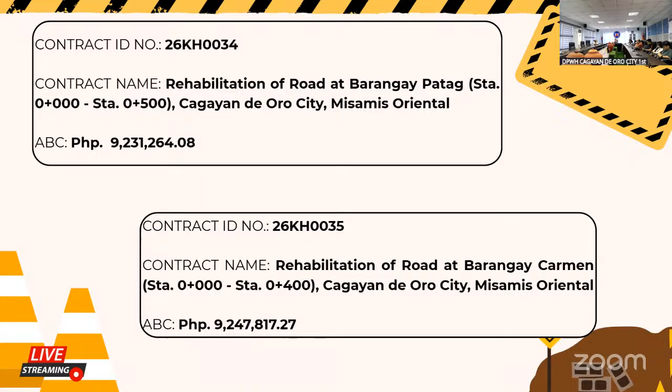So now we will start with the first project, 26KH0032, rehabilitation of road at Barangay Bayanga, Cagayan de Oro City, Misamis Oriental. This will be discussed by Engineer Aris Arizo.

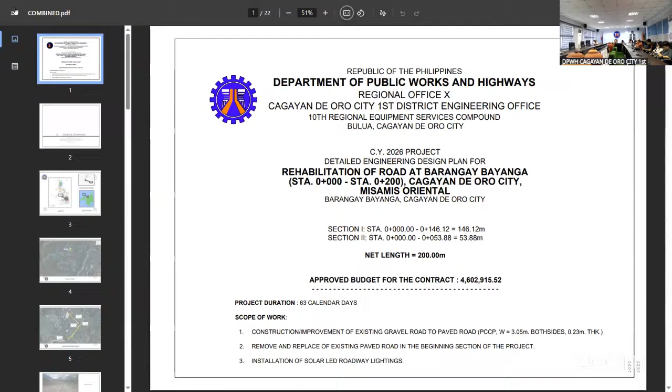Good afternoon, everyone. Rehabilitation of road at Barangay Bayanga, Station 0 to Station 200. This project is composed of two sections: Section 1, 146.12 meters, and Section 2, 53.88 meters, a net length of 200 meters. The approved budget for the contract is 4,602,915.52, and project duration is 63 calendar days.

The scope of work is improvement of existing gravel road to paved road, PCCP width of 3.05 meters both sides and 0.23 meters thick PCCP. There's also a section of remove and replace of existing paved road in the beginning of the project, and installation of solar LED roadway lightings.

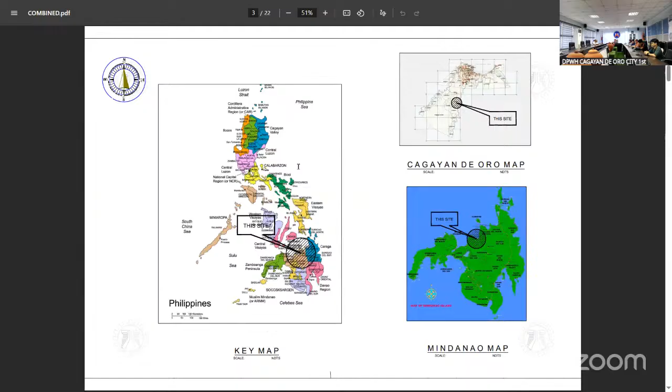General drawings: it is located in Barangay Bayanga. This is the vicinity map, and this is the site development plan wherein we can see section 1 and section 2. In the beginning of section 1, there is a section of remove and replace of existing PCCP.

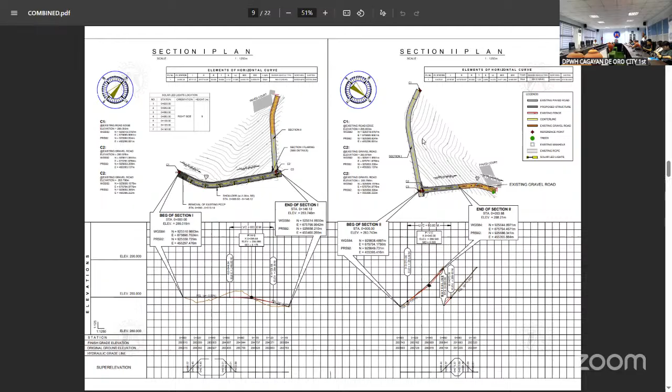So in continuation, sorry for the technical difficulties. You can see the plan and profile, section 1 and section 2. There's a portion in section 2 wherein the PCCP only caters 53.88 to get the 200 meters length. There's also the stationing of the solar LED roadway lighting. This is the straight line diagram.

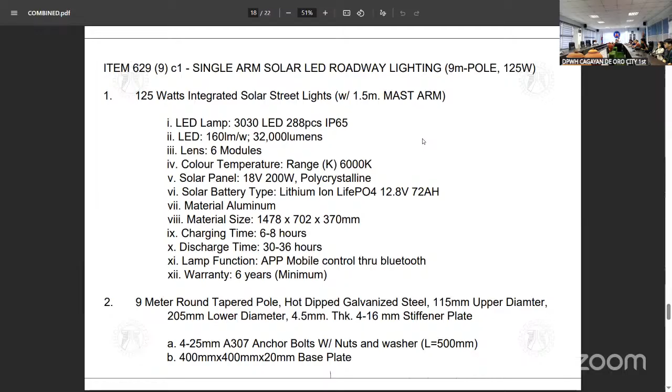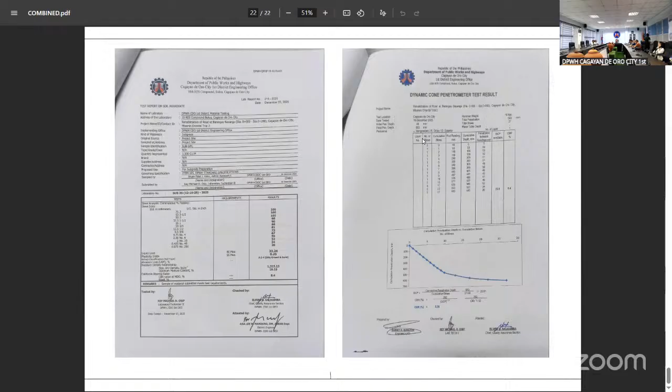So this is the specifications for the single arm solar LED roadway lighting. And we have here the attachments for our road right of way. We have here the permit to enter. And also in the attachment we have here our test reports for our soil investigation. So that's all for this project, sir.

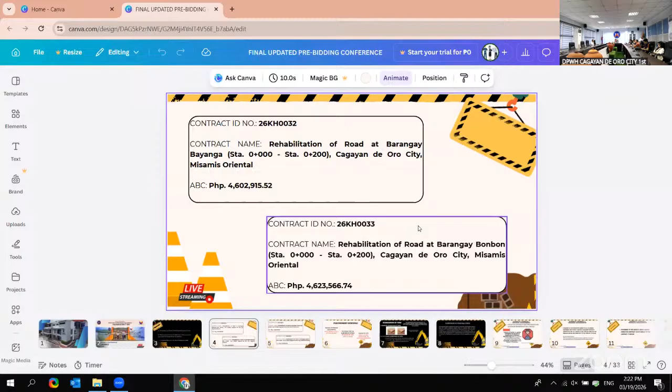Are there any questions from our prospective bidders? And from online viewers? So we proceed to the second project. Okay. So second project, 26KH0033, rehabilitation of road at Barangay Bonbon, Cagayan de Oro City, Misamis Oriental. This will be presented and discussed by Engineer Sheena Donatore.

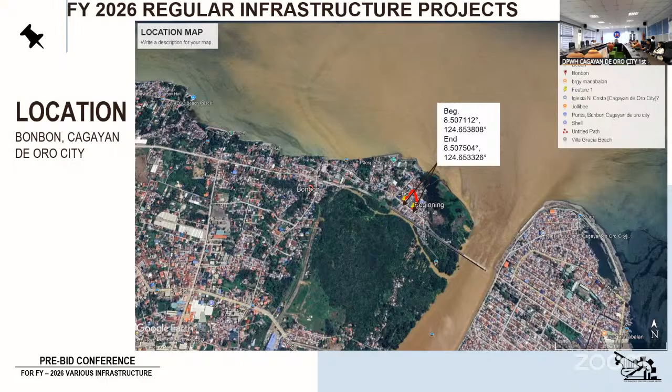Presenting to you 26KH0033 for rehabilitation of road at Barangay Bonbon, Station 0+000 to Station 0+200, Cagayan de Oro City, with 77 calendar days. Location Barangay Bonbon, with an approved budget for the contract of 4,623,566 pesos and 74 centavos. The scope of work: construction and improvement of gravel road to paved road and installation of solar street lights. This is the location for the project. Beginning station is near the Bonbon covered court.

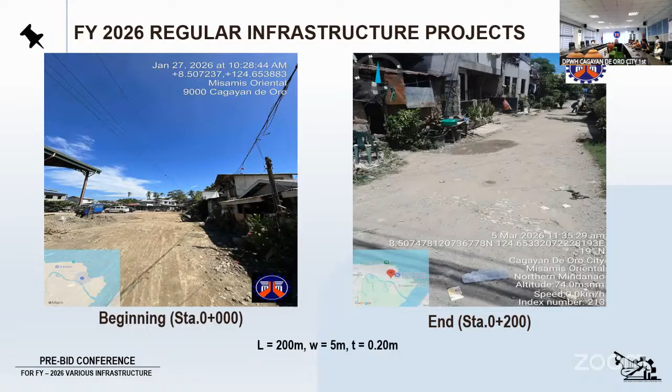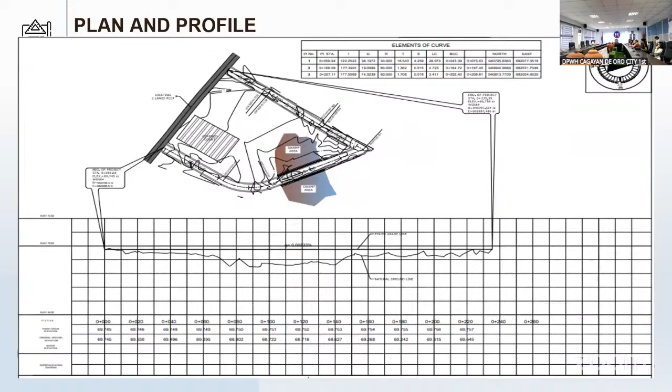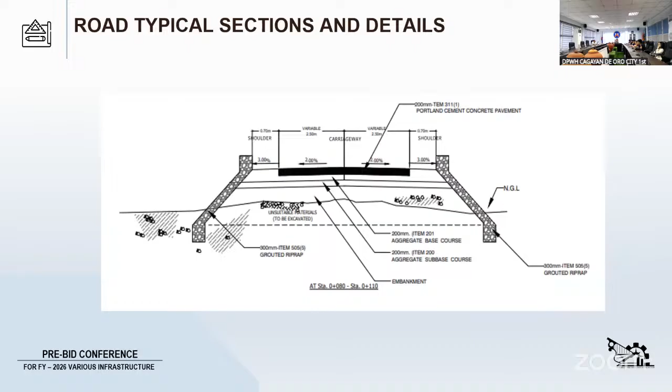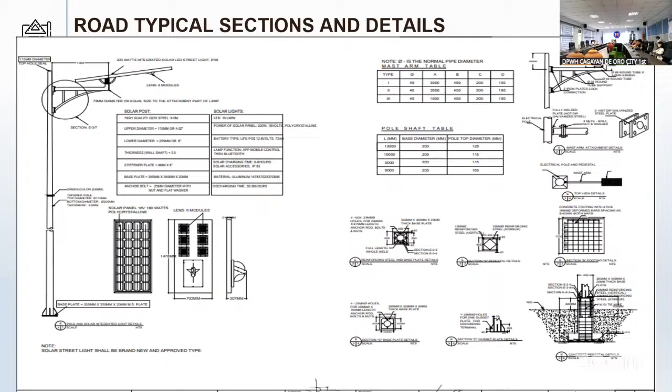This is the site location map, beginning and end station, with a length of 200 meters, width of 5 meters, and thickness of 0.20 meters. This is the plan and profile. The typical sections and details, including the slope protection detail. Closer look of the typical road section. And typical road lighting detail, pole light detail. Protections. Summary of quantities.

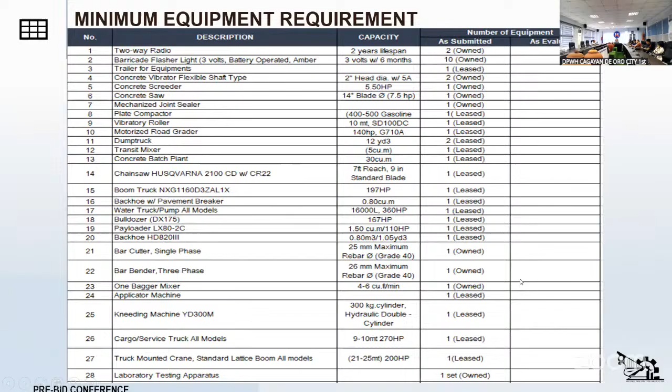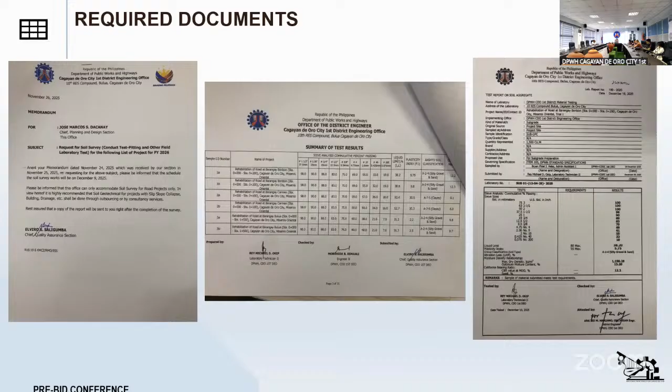These are the additional required documents for the road right of way. Certification of no objection from the barangay. The soil test results reports. And the straight line diagram. That's all, quantities are subject for bid bulletin, that's all for this project. Thank you.

Thank you, Mr. Sheena. Do you have any questions or clarifications from our speakers? Online viewers, if you have. There is none, sir. No question, so we proceed to the third project.

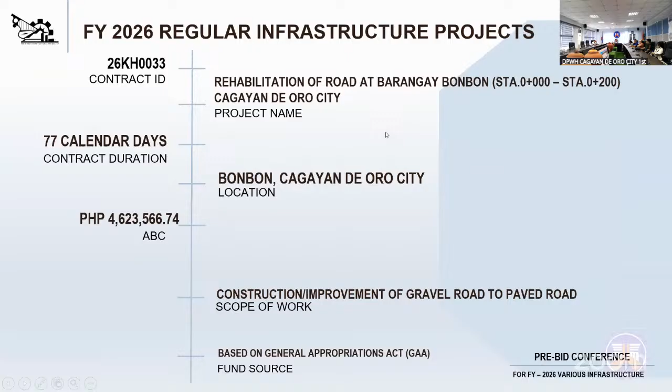Our third project is rehabilitation of Barangay Patag, Misamis, with contract ID number 034. Our presenter is Engineer Paris. So good afternoon again. So rehabilitation of road at Barangay Patag, Station 0 to Station 500, Cagayan de Oro City, Misamis Oriental, Barangay Patag.

So this project is composed of 4 sections. Section 1 has 82.02 meters. Section 2, 112.12 meters. Section 3, 237.23 meters. And section 4 has a gap in between, so 0 to 31.98, and 100 to 136.65 meters, 36.65 meters. So this project has a length of 500 meters.

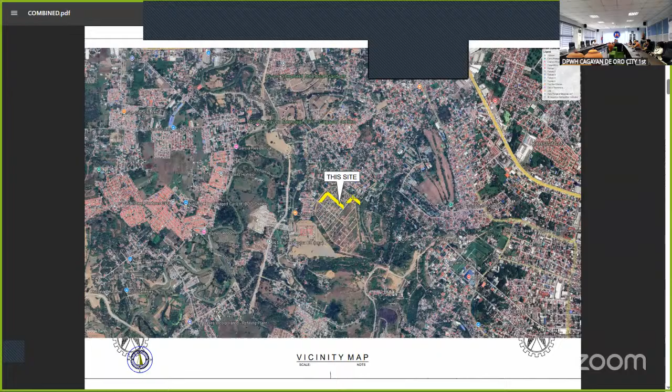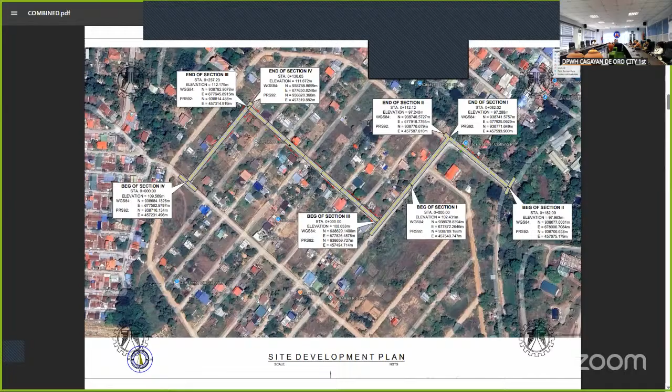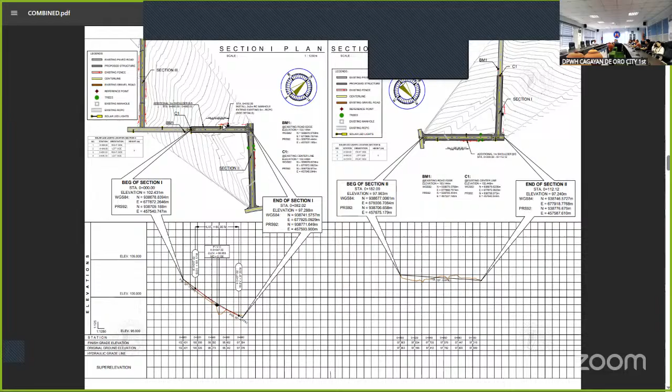And also we can see here the installation of 2 by 2 meters RC manhole, wherein we're going to repair a damaged RC pipe. We're going to install a 2 by 2 meter RC manhole. We can see the details. So these are section 3 and section 4. And in section 4, we can see the station gap between, and also the stationing of the solar lights.

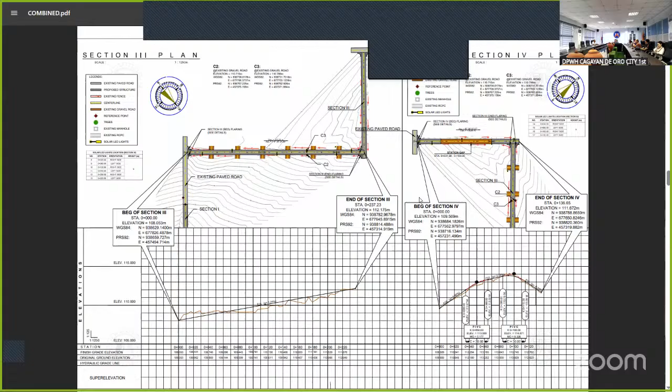This is the straight line diagram of every section. So for typical drawings, you can see here the typical section details with width of 3.05 meters both sides each, and installation of solar street lights. We can see also here the details of the manhole to be installed. And also accompanying this project is the reflectorized pavement markings. And since this has junctions, we will have flaring details for every junction.

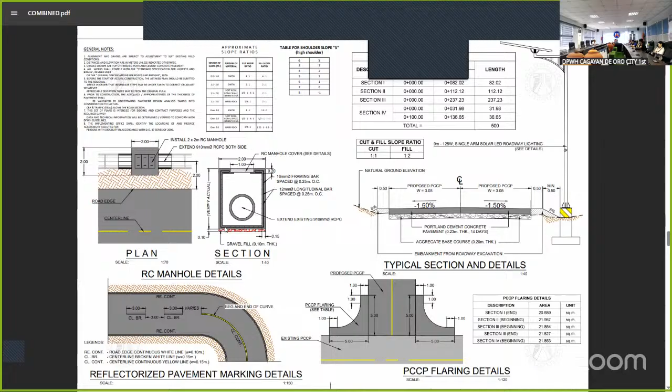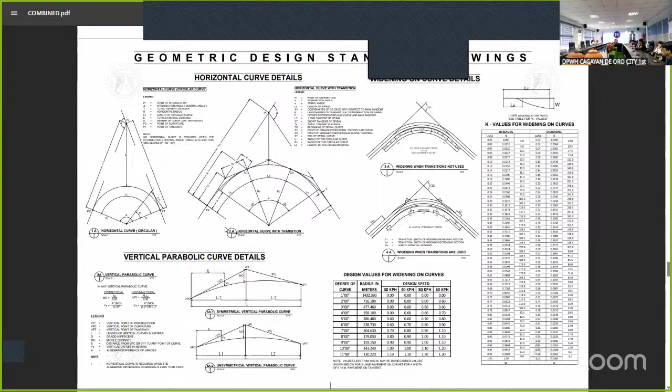So this is the details for the Portland cement concrete pavement, for our geometric design standard drawings. This is the detail for the manhole cover. For summary of quantities, we have here B.5 project billboard and signboard, 4 each. B.7.2 occupational safety and health program, 1 lump sum. B.8.1 traffic management, 2.17 months. B.9 mobilization demobilization, 1 lump sum.

102.2 surplus common excavation, 1,386.13 cubic. 103.1A structure excavation common soil, 31.38 cubic. 104.1A embankment from roadway excavation common soil, 352.16 cubic. 104.7 gravel fill, 2.85 cubic. 201.1 aggregate base course, 763.79 cubic. 311.1C1 Portland cement concrete pavement unreinforced 0.23 meters thick 14 days,

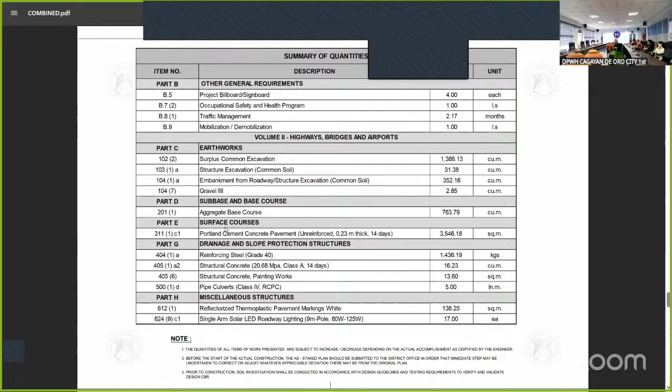3,546.18 square meters. 404.1A reinforcing steel grade 40, 1,436.19 kilograms. 405.1A2 structural concrete 20.68 megapascal class A 14 days, 16.23 cubic. 405.6 structural concrete painting works, 13.6 square meters. 500.1D pipe culverts class 4 RCPC, 5 linear meters. 612.1 reflectorized thermoplastic pavement markings white, 138.25 square meters. 624.9 C1 single arm solar LED roadway lighting 9 meters pole 80 to 125 watts. So this summary of quantities is subject to changes which will be posted for bid bulletin.

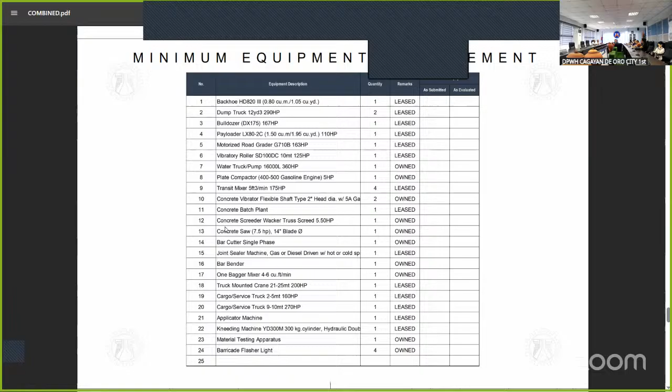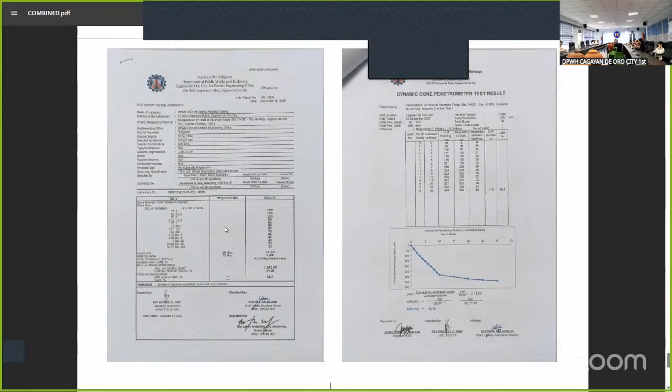For our attachments, we have the soil reports for soil investigations. And for our road right of way attachments, we have the public consultations and permit to enters.

So that's all for this project.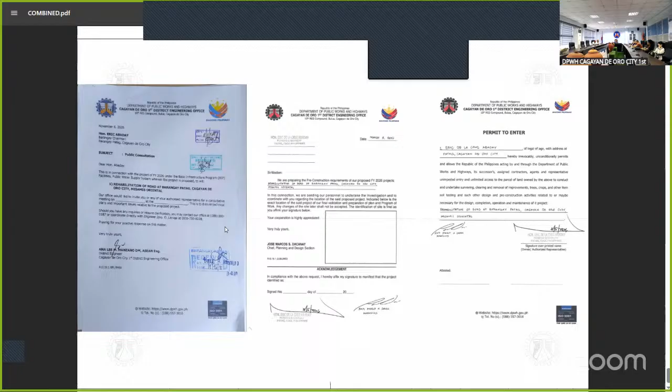It's the rehabilitation of road at Barangay Carmen, Cagayan de Oro City, with contract ID 26KH0035. This will be discussed and presented by Carmen and Carl.

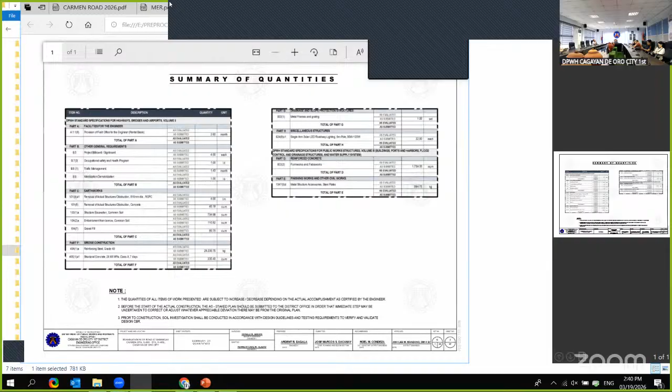Good afternoon everyone, once again, and to the online viewers, I'll be presenting and discussing contract ID 26KH0035 with the title Rehabilitation of Road at Barangay Carmen, Station 0+000 to Station 0+400, Cagayan de Oro City.

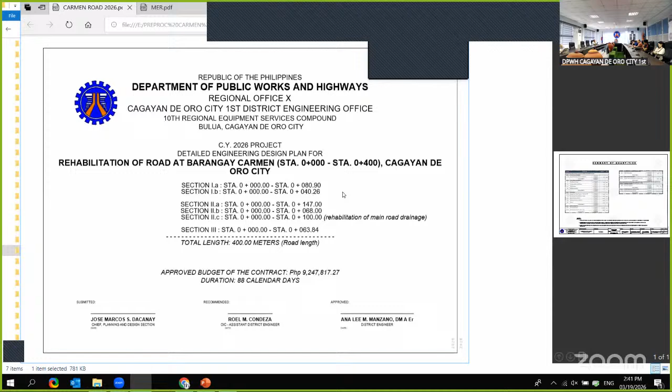This project consists of 3 sections: section 1.A, section 1.B, section 2, and section 3 with a length of 63.84 meters. For section 2, there's rehabilitation of road drainage to refer to the drainage of section 2.A and B. The approved budget of the contract is 9,247,817.27 pesos, with a duration of 88 calendar days.

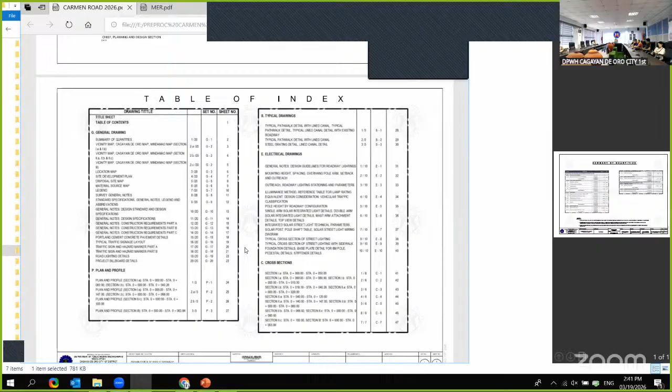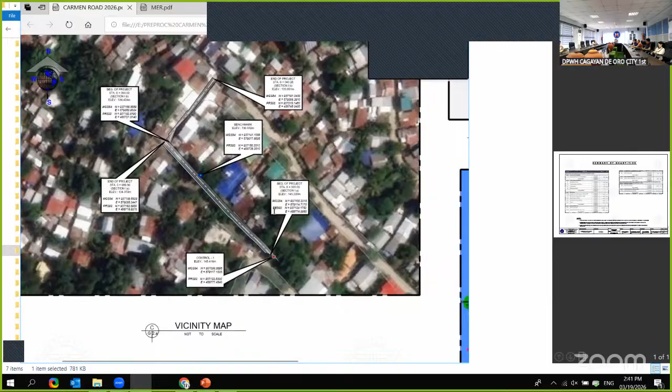This is the table of index. For the vicinity map, this is the vicinity map of section 1. It has 2 parts, section 1.A and section 1.B.

Vicinity map of section 2. It has 3 parts. Section 2, part C, is drainage only. Vicinity map of section 3.

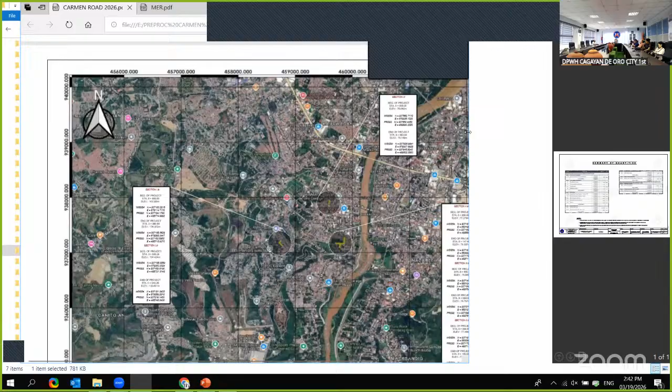This is the location of the 3 sections with their respective coordinates.

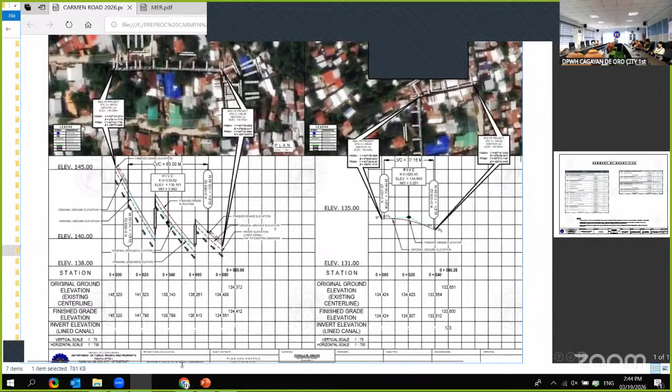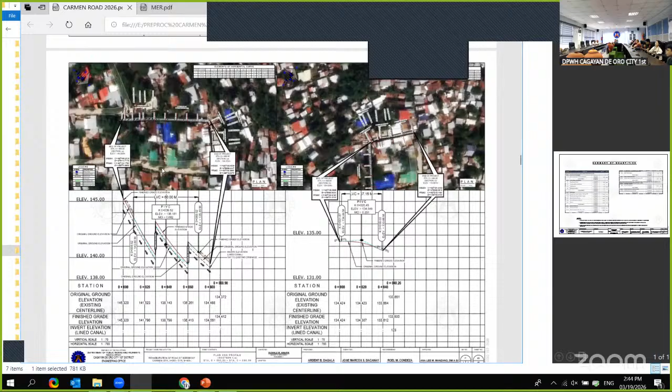This is the plan and profile for section 1. The left side is section 1.A and the right side is section 1.B.

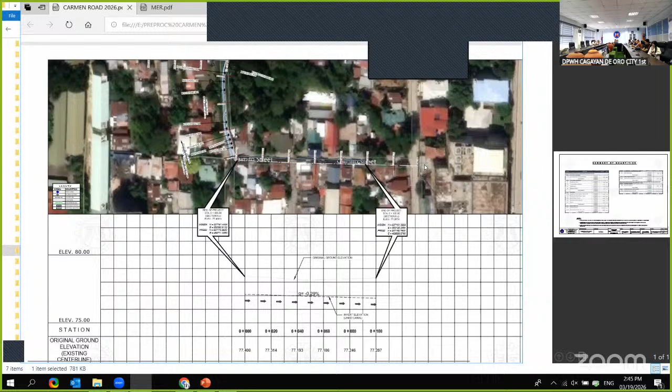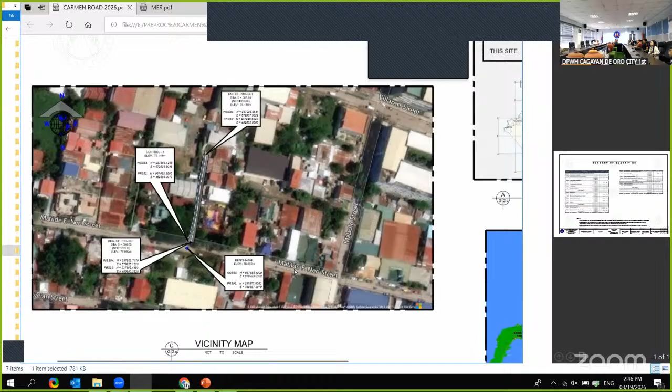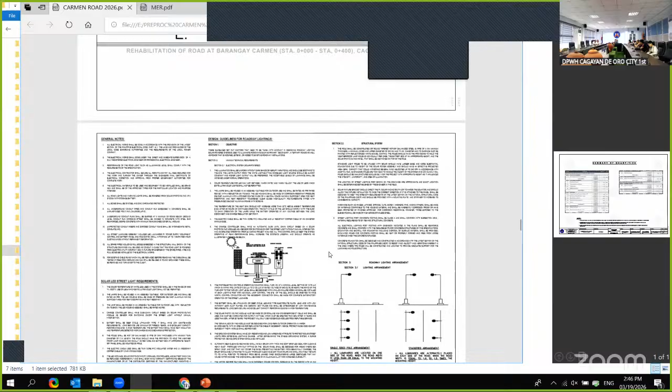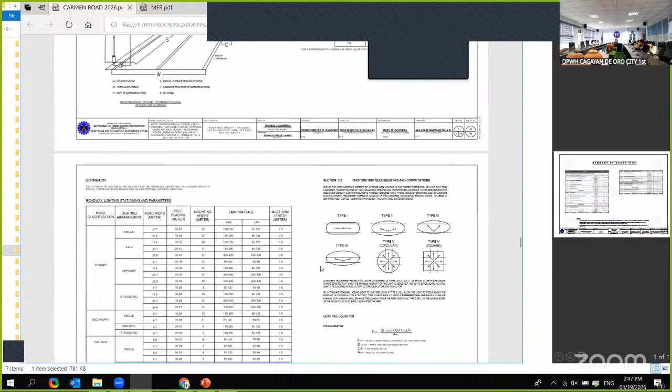Typical patchwork detail with line canal - this is the typical detail. For electrical drawings, since there is a solar LED street light, these are the typical specifications and details. This is the cross section.

For the minimum equipment requirement, we have trailer for equipment 1 leased, backhoe with pavement breaker 1 leased, dump truck 2 leased, backhoe solar 1 leased, boom truck 1 leased, cutting outfit 1 owned, motorized road grader 1 leased, vibratory roller 1 leased, water truck 1 leased, concrete vibrator 2 leased, welding machine gas or diesel 1 leased, plate compactor 1 leased, pumpcrete 1 leased, bar cutter 1 owned, bar bender 1 owned, cargo or service truck 1 leased, laboratory testing apparatus 1 set owned, cargo service truck 2.5 metric tons 1 leased, truck mounted crane 1 leased, stake truck 1 leased.

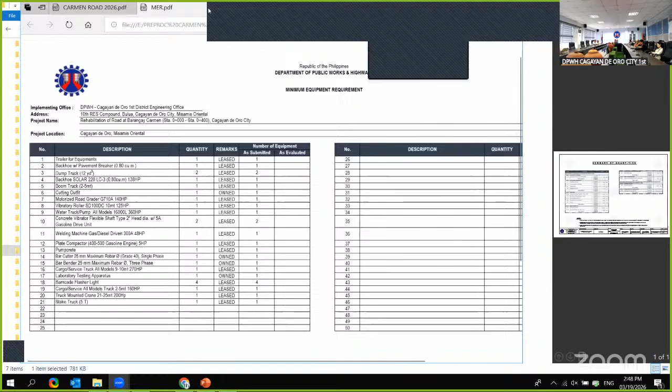This is the pay item for the quantities involved in this project. So we have...

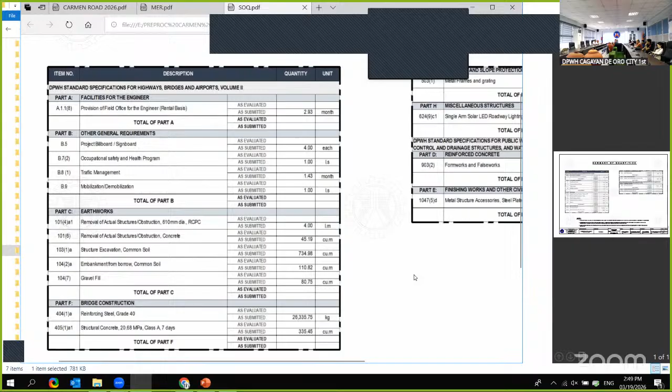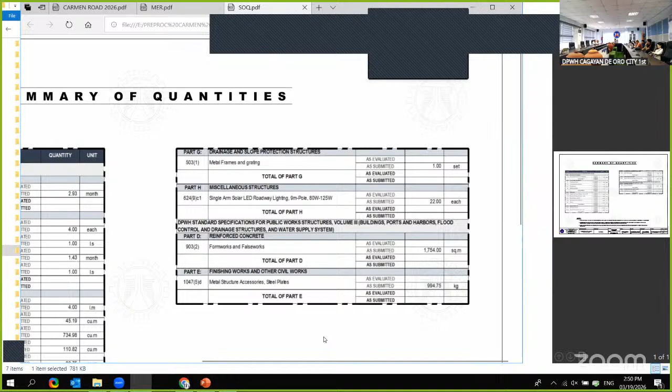A.1.1.8 provision of field office for the engineer, 2.93 months; B.5 project billboard signboard, 4 each; B.7.2 occupational safety and health program, 1 lump sum; B.8.1 traffic management, 1.43 months; B.9 mobilization, demobilization, 1 lump sum; 1014A1 removal of actual structure obstruction, 610mm diameter RCPC, 4 linear meter; 1016 removal of actual structure obstruction concrete, 45.19 cubic meter; 1031A structure excavation common soil, 734.98 cubic meter; 1042A embankment from borrow common soil, 110.82 cubic meter; 1047 gravel fill, 80.75 cubic meter; 4041A reinforcing steel grade 40, 26,335.75 kilograms; 4051A1 structural concrete 20.68 megapascal class A 7 days, 335.45 cubic meter; 5031 metal frames and grating, 1 set; 6249C1 single arm solar LED roadway lighting, 9-meter pole, 80 watts to 125 watts, 22 each; 9032 formworks and falseworks, 1,754 square meter; 10475D metal structure accessories, steel plates, 994.75 kilograms.

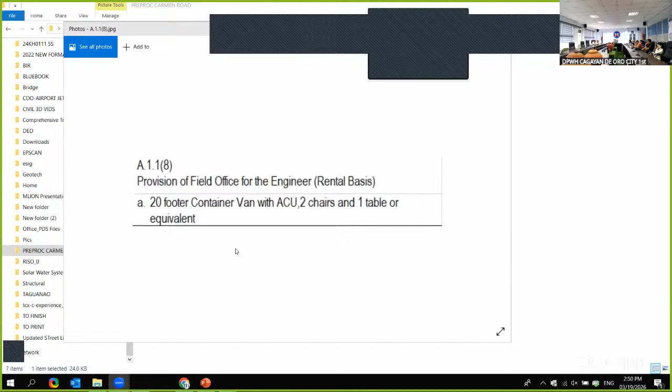For A.1.1(8) provision of field office for the engineer, rental basis, we have a 20-footer container van with AC unit, 2 chairs and 1 table or equivalent, rental basis.

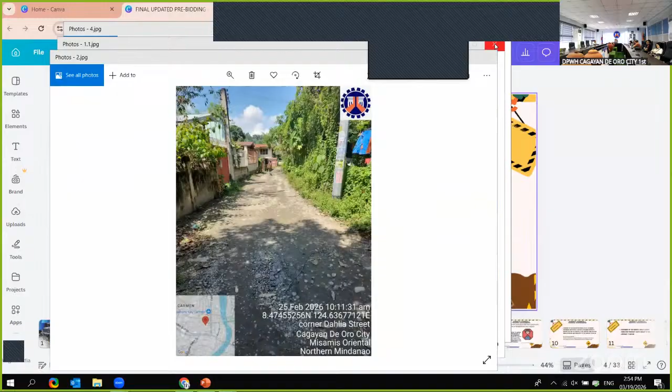Narayda. Go ahead, share that.

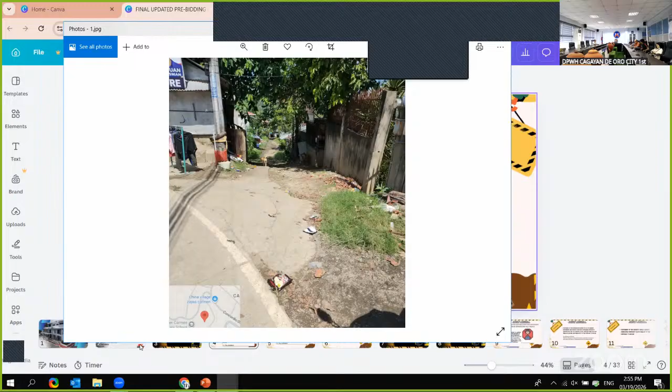For the procurement schedule, the buying of tender documents is until March 31, 2026 at 9:30 AM only. The deadline for the submission of bids will be on March 31, 2026 until 10 AM only. The opening of bids will follow right after the deadline or the dropping of bids.

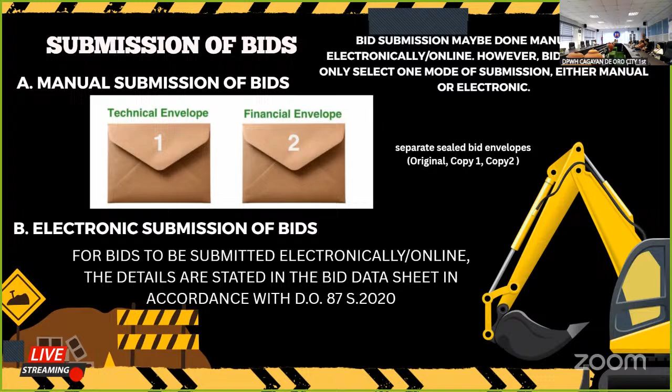The bid submission may be done manually or electronically. However, bidders should only select one mode of submission, either manual or electronic. So here we have the manual submission with the two envelope system. And for electronic submission, the details are stated in the bid data sheet.

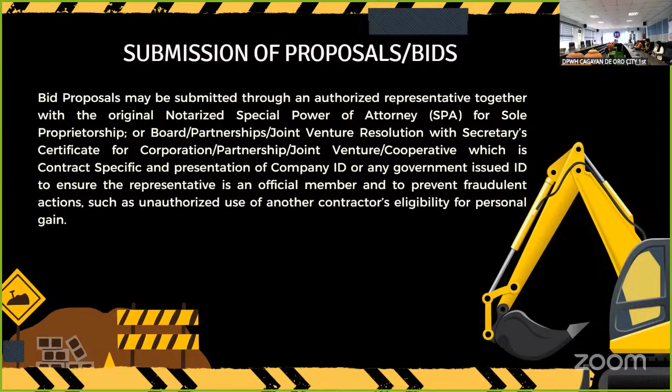Bid proposals may be submitted through an authorized representative together with an original notarized special power of attorney for sole proprietorship, or board/partnership/joint venture resolution with secretary certificate for corporations, partnership, joint venture, cooperative, which is contract specific, and presentation of a company ID or any government issued ID, to ensure the representative is an official member and to prevent fraudulent actions such as unauthorized use of another contractor's eligibility for personal gain.

For the first envelope, the bidder must provide a valid PhilGEPS registration certificate, platinum membership, all pages. Failure of the bidder to update the PhilGEPS certificate of registration shall result in an automatic suspension of the bidder's certificate.

Next, the bidder must provide a statement of all ongoing government and private contracts, including contracts awarded but not yet started. Take note, failure to disclose the required information or providing incomplete or false details may result in disqualification from the bidding process.

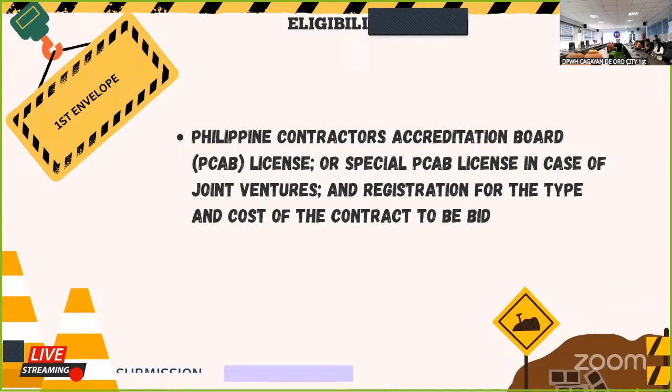Next, the bidder must provide a single largest completed contract, or the SLCC. They must also provide a PCAB license or special PCAB license for joint venture.

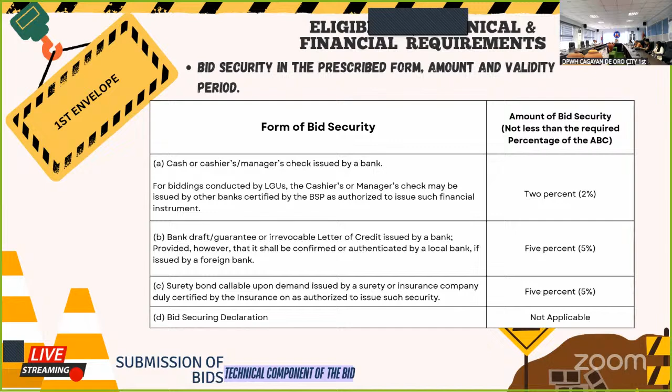Next, we have the bid security. We have 4 forms of bid security. The bidder will only choose one form to be submitted. Here we have the 4 forms of bid security with the corresponding amount, and the standard form for the bid security declaration.

Next, the bidder must provide an organizational chart for the contract, the list of contractors' key personnel, and the list of contractors' major equipment units. Please see the attached bidding documents for the required years of experience for the key personnel and the number of units and capacity for the major equipment.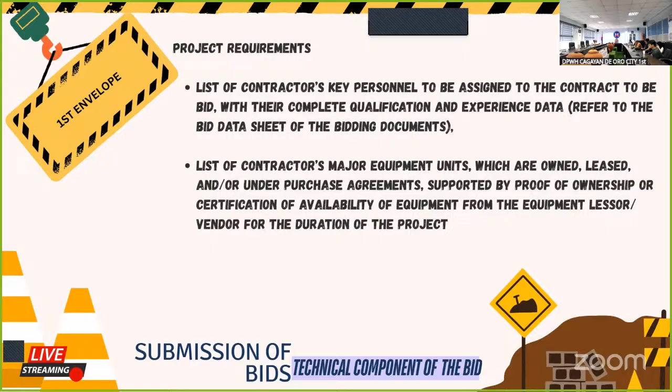Next, we have the standard form for the key personnel, and the standard form for the list of major equipment units.

Next, the bidder must provide an original and duly signed omnibus sworn statement, and the net financial contracting capacity, or the NFCC, and if applicable, a joint venture agreement. Next, we have the standard form for the omnibus sworn statement.

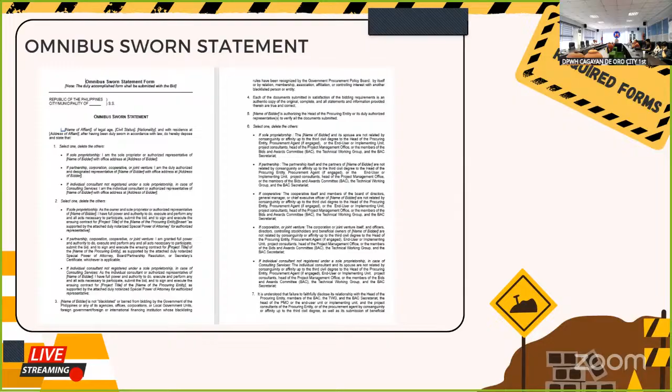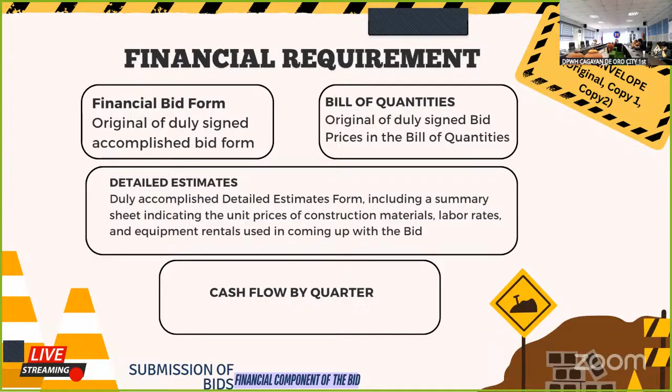Next, for the second envelope, the bidder must provide an original and duly signed accomplished financial bid form, bill of quantities, the detailed estimates, and the cash flow by quarter. These are the standard forms for the bid form, the bill of quantities, the detailed estimates, and the cash flow by quarter.

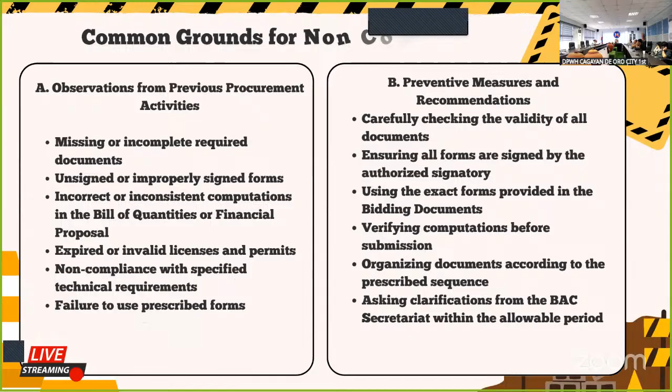And these are the observations from the previous procurement activities and the preventive measures and recommendations. That is all, Mr. Chair.